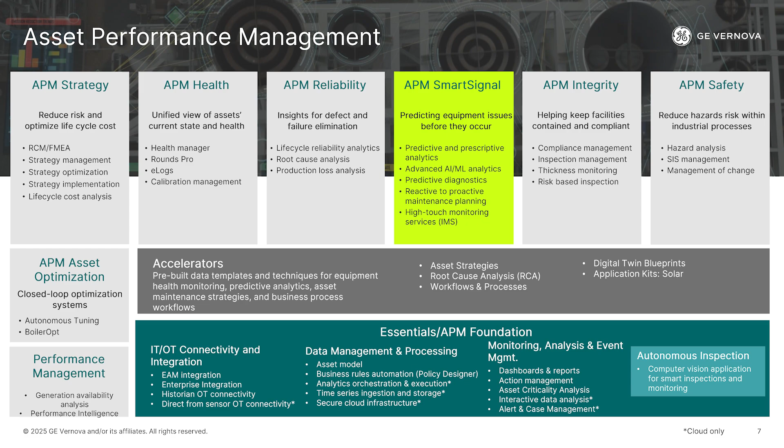I want to take a second just to go back. My name is Marcus Pugh. I'm the Industrial Managed Services Leader. I'm based in Florida. I've been with the GE family of businesses for 20 years. This year will be my 20-year anniversary.

I also want to introduce Bilal Syed Bukhari, one of our subject matter experts and customer reliability managers. Bilal works directly with our customers to help deliver the services that we're going to talk about here in just a moment. So again, our managed services organization has been in existence for the past 15 years, with collectively over 800 years of experience between the combined team.

And you can see the different industries that we support between oil and gas, power generation, manufacturing, metals mining, aviation. We do provide our services with APM to these different industries. I'd like to call your attention to another interesting point here.

We currently monitor over 7,000 assets using APM. And then we've transitioned over 11,000 assets. What that means is we've transitioned 11,000 assets that we were monitoring to the customer's team, and they're monitoring it with their M&D or their own monitoring center at this point.

So again, managed services, the team that Rahul mentioned, we're here to be the journey partner with you to help you on your journey of adopting this solution within your organization, or we'll continue to utilize the solution on your behalf. So a couple of things to share with you here, collectively across all of our customers.

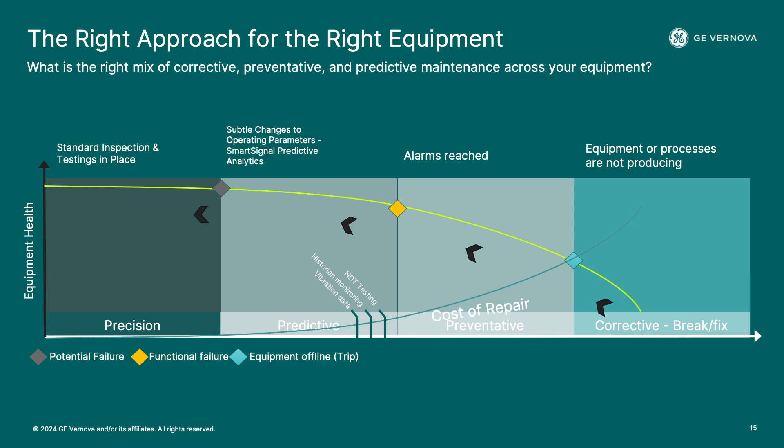Now, moving ahead, a little bit about refreshing the technology for those people in the room who are not very familiar. The SmartSignal analytics use multivariable data from a number of tags and correlate them to generate estimates for each and every data vector that comes in.

It then compares the actual value from that sensor against the model estimate, and wherever they are outside a dynamic band, it identifies that as an anomaly and then sees what other tags are going outside that dynamic band, correlate to potential failure modes, and highlight that as an alert or a risk for the analyst to pick up. And that's where the monitoring teams come in.

When you go for the APM solution from GE Vernova, a key differentiator that we don't talk about a lot, it's not an empty shell. It's not a software-only solution you are buying, you are implementing. It comes with a very comprehensive and a very powerful engineering content pre-built into it, which is what we call the blueprints.

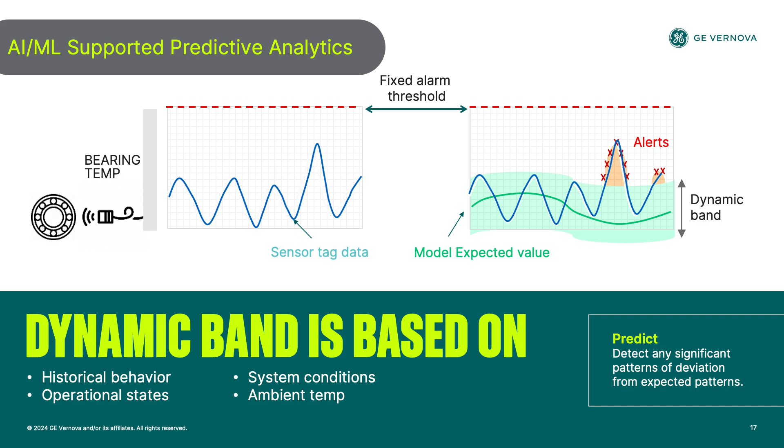You as a customer do not need to create analytics from scratch. GE has invested years and years of time and effort in developing that engineering content in line with the latest industry standards, with all the latest sensorization that is available. So you, as our customers, get the advantage of having the best-in-class failure mode coverage right away. You can obviously enhance, add to those analytics. That is very much a capability within APM.

But what comes along with SmartSignal is the extensive portfolio of over 340 different asset type blueprints that we have, covering anything from aeroderivative engines to boilers to distillation columns, you name it, and we have a blueprint with analytics models already available with us. So you get the value. Now, where is the value?

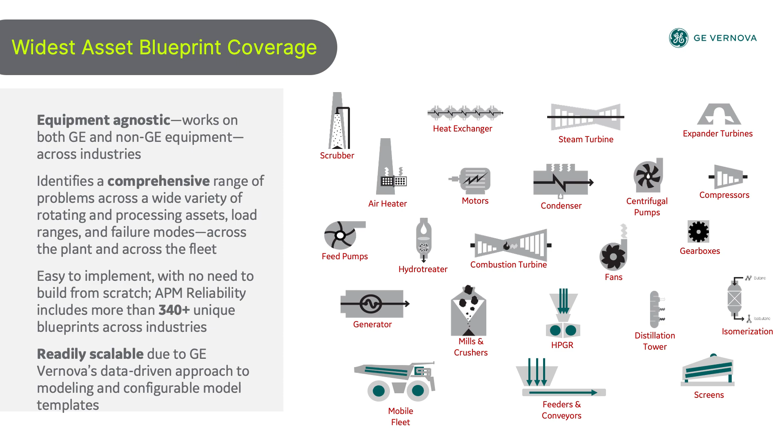One, the value is you don't need to really reinvent the wheel, which otherwise would take anybody in the room who has done an FMEA exercise. Even with libraries, it takes weeks and months to develop an FMEA for an asset, and then define failure codes. This is all pre-built in our blueprints. So that's the value you get. And then obviously you can add on to that.

Now, I really wanted to highlight this point because many times it is a mystery. What is a blueprint? We are talking about the digital twin, something very exotic, right? Coming from the field, I always used to be very afraid of technology.

What does all this AI and ML mean? But when I started looking at the blueprints, I started realizing this is the language of converting what we interact with as operators, asset owners on a day-to-day basis to a digital platform. So an asset, a physical asset, which we all as asset owners operate, we are more intimately familiar with a layout of that asset, a PFD, a P&ID, an instrument diagram. That, as maintenance engineers, as operation engineers, as maintenance supervisors, technicians, we are more familiar with.

The blueprint is exactly that. It divides an asset into different systems or components of which the asset is comprised, and it consolidates all relevant sensors that can be leveraged or pulled together to identify specific failure conditions in that specific system. We call them models. So, for example, a lube oil system is one specific model within a blueprint. The mechanical failure modes are covered under the mechanical model.

So, for example, here what you see is the mechanical model for a simple boiler feed water pump. So people who are out in the field can easily recognize this. You have worked on this equipment thousands of times. A digital twin blueprint is exactly a digital representation of the same asset. This is GE's blueprint that is readily available. We know all the different possible tags or instruments that can be there on this type of asset, which we can readily map. And these then feed into the relevant diagnostics that generate for that asset.

Another very, very important thing. So this is for a very simple asset, a boiler feed water pump. Look at all the different models. It has a performance, mechanical, driver model, two different coupling models, and a lube oil model. Simple asset, but broken down very systematically into different sections, systems, where you can then identify what exact failure mode is happening over there. You also are able to identify what instruments are required.

Now, something very interesting I'll tell you. Some customers, having very old assets, are using the information that is available in our blueprints to carry out a gap assessment, with sensorization technology now very convenient and more economical. It's easier to get sensors on low-instrumented but critical assets, which you couldn't previously do. And our blueprints help you do that.

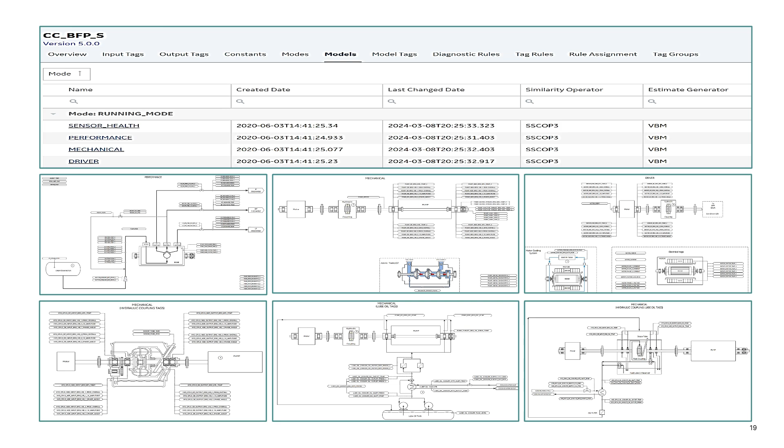When we say trust the green line, what does it mean? So as an ex-customer myself, many years in the field, my job was spending 8 or 10 hours in an engine room and taking measurements. And my boss, very nice gentleman, but not so nice at times, would not be happy unless I gave him those 12 sheets at the end of my shift. Now, whatever he did with those sheets, I never could understand after 2 years in that role. But he wanted that data.

But when I started doing this 10 years ago, initially I was also very skeptical. What is this green line telling me? But the green line really tells the story. It takes a while for customers to trust and move away from the experience-based approach to taking maintenance or operation action. But that's exactly what the green line does for you. And customers who do trust the green line are able to gain tremendous benefits.

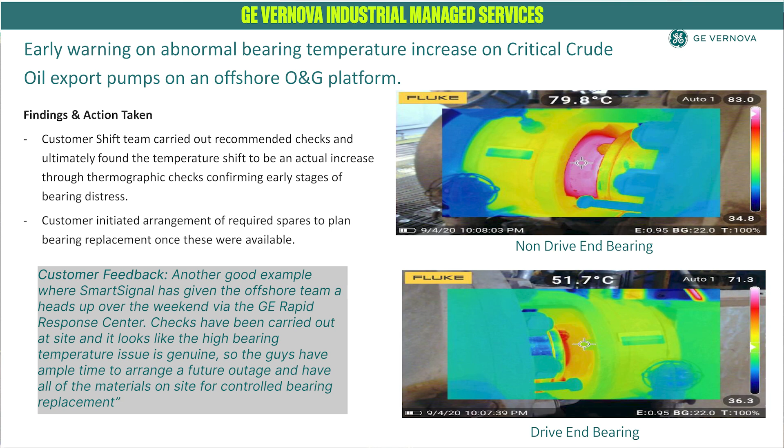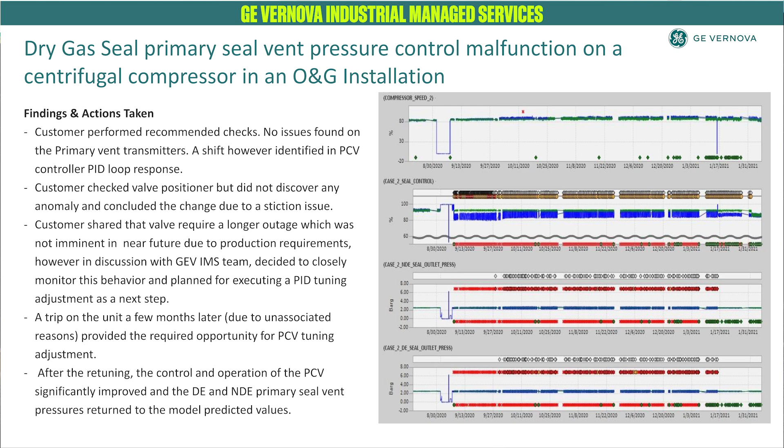Now, for those of you who are from the oil and gas industry, the dry gas seals contain the process gas within the casing. A leakage of that process gas means you cannot run the equipment. Now, this was only a 10% hunting. No alarm is being hit as of now. We picked it up. Within the team, we had people, including myself, who have converted compressors from conventional wet oil seals to dry gas seals on over 40 different units. And we knew this is a failure mode in our blueprint, which is called seal face chatter.

The dry gas seal runs a thin cushion of gas, in microns. And when this starts to happen, that cushion starts to vary. And then the seal faces clash, and ultimately get damaged. Highlighted it, told the customer, guys, your back pressure control valve has the problem. Either it is sticking or it is going out of tune. Take it down and fix it, because you have an imminent seal failure on your hands if you don't fix it. The seal failure has not happened.

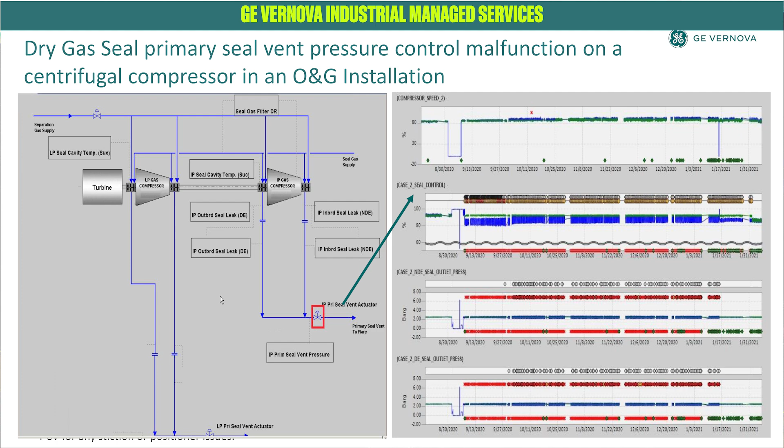Remember, the seal is still healthy, but it's wearing now. They said, well, we can't take it down, Bilal. We have production targets. Okay, we will monitor it for you. Write a work order. If you have an emergency trip, fix it. A couple of months down the road, they had an emergency trip. They tuned the valve and were back where they wanted it to be. Excellent. No failure, proactive action, and something which would never have been detected. Only when the seal failed would the alarm come.

Second lesson, quantifying risk always helps decision making. All right, so within APM, we have something which we call a risk avoidance calculator or a cost benefit calculator. When you have a case where you need to make a decision, either at the start or towards the end, you can quantify that risk into tangible dollar values. That's what the senior big guys want, right? What is the value of this risk? Sometimes we people on the front line don't really understand that, but it's important.

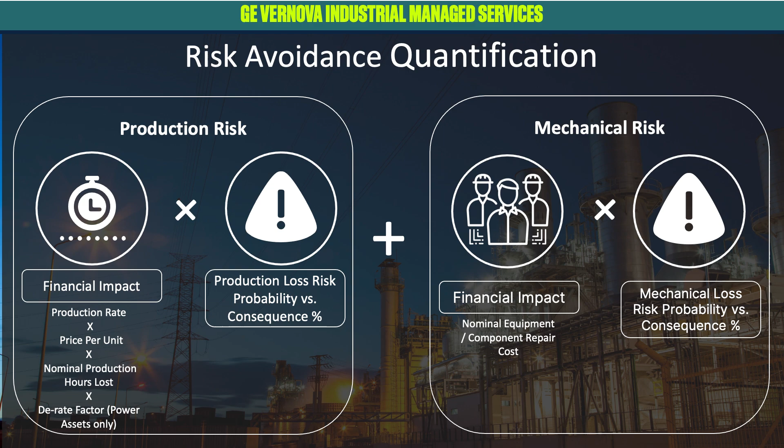So we have the ability to calculate the production risk based on the financial impact of that asset going down, multiplied by the probability of that event causing that production impact. Similarly, we are able to calculate the mechanical risk. Both of these are available within APM.

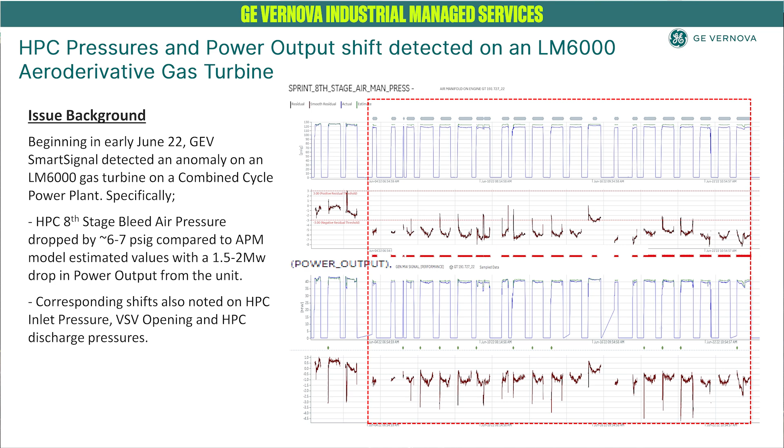Here is an aeroderivative gas turbine somewhere in Europe, running fine, until one day we noted a 6 to 7 PSI drop in the 8-stage bleed air pressure line, along with a 1.5 to 2 megawatt drop in power. We saw some other changes happening as well. The IMS team was looking at it together with our M&D folks. We notified the customer, well, you probably have either a leakage on the 8-stage bleed or your VBVs, the variable bleed valves on this unit.

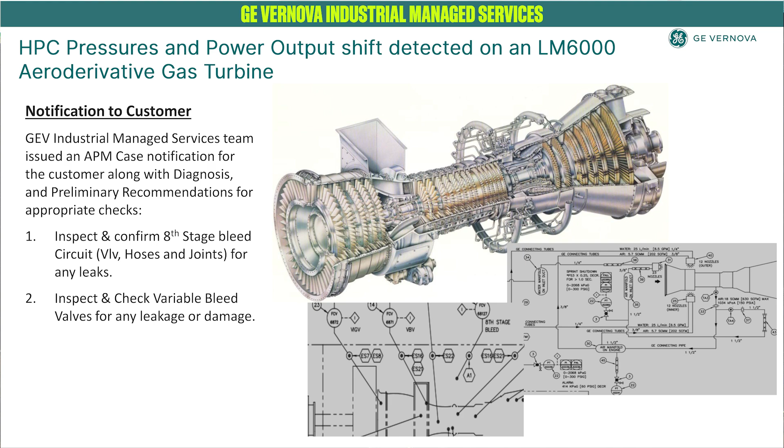There is a passing on them. This doesn't trip the unit, by the way, not in this situation. So the customer was a bit undecided whether they should take it down or not. And we said, hey, that's fine. Let's do a risk avoidance calculation and see what is the loss that you will encounter.

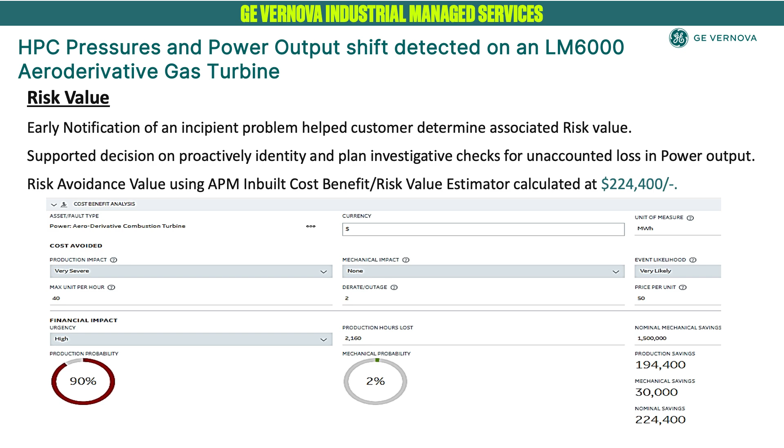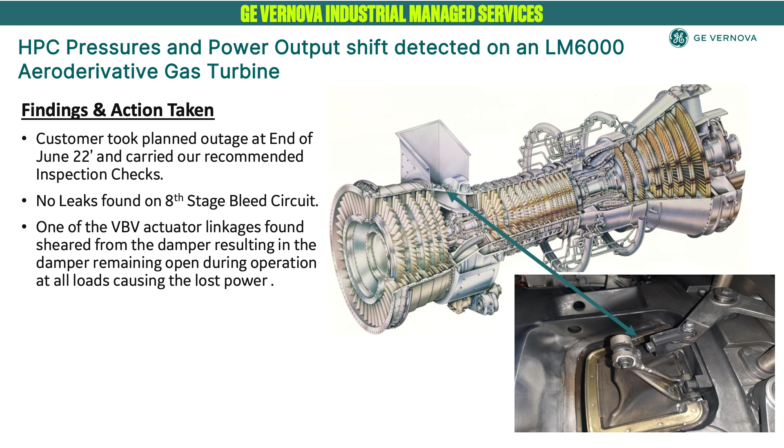They did a risk avoidance calculation, and they said, running like this, the loss on power alone until their next planned outage would cost them over $200,000 in revenue. Now that does make things much clearer, right? Would your boss really want you to lose $200,000 when you have a standby unit available and not take this down for a day and a half and fix this?

I think the answer in most cases would be no, go ahead and do that. And that's exactly what they did. They took a day and a half outage, quickly checked, they didn't find any leakages on the 8-stage bleed line, but they did find that one of the VBV linkages, they have multiple VBV doors over there, had sheared off. They fixed it, came back online after 1.5 days, and you can see immediately pressure recovering and power

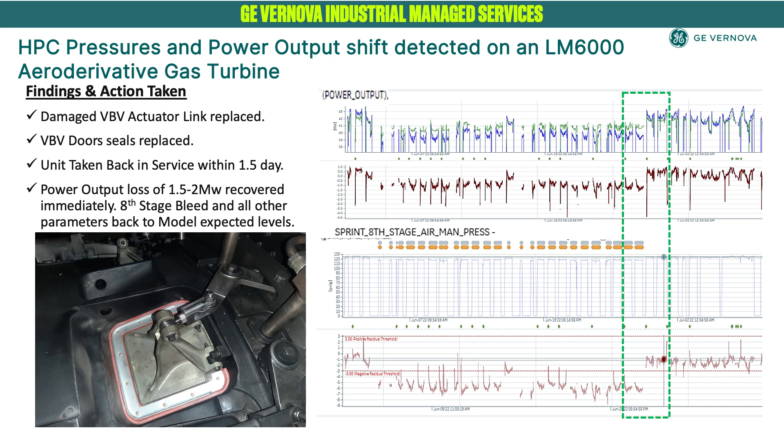back up. So the lesson here is, many times the risk is identified at such an early stage that you perhaps by experience say, well, it's okay, the unit can run. You're more focused on availability. You're not focused on the financial risk that it entails. So this helps as well to know.

Last thing, and the most important bit, failure elimination is a team sport. It's not about us, everybody has to work together to get this. You have amazing software, yes, but the people element who drive this and collaborate effectively is what brings the winning formula.